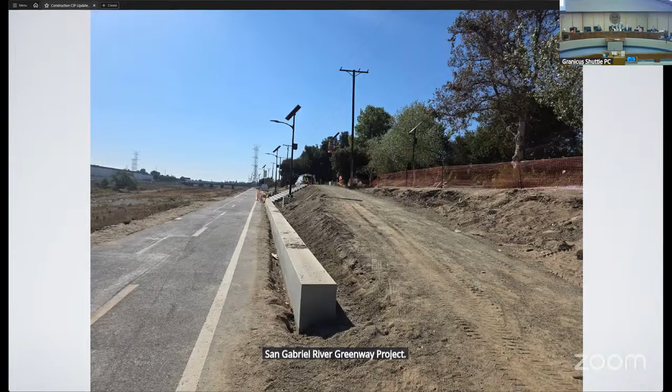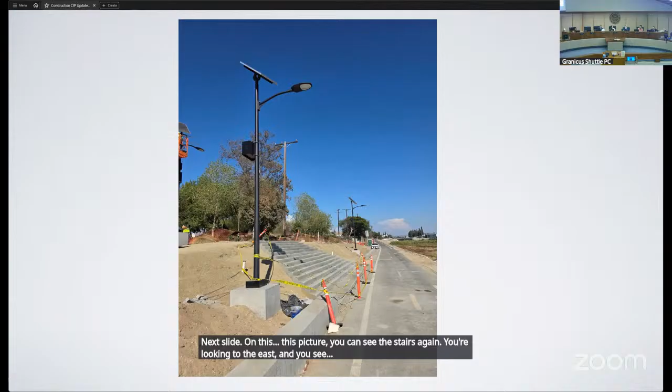These are just a few pictures from our San Gabriel River Greenway project. Here you're looking to the west. Those are seat walls, and in the background you can see the stairs. The stairs were poured yesterday, starting to take shape there at the grand entrance. On this picture, you can see the stairs again. You're looking to the east, and you see a couple of the street lights.

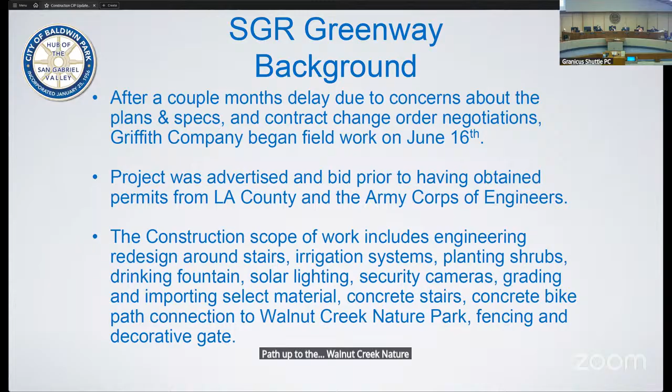Griffith Company mobilized and began construction on June 16th. This was after a couple months of delay due to concerns with the plans and specifications and negotiating a few change orders. Part of that stemmed from the project being advertised and bid prior to obtaining the permits from LA County and the Army Corps of Engineers. The scope of work included engineering redesign, the stairs, irrigation systems, plantings, drinking fountain, solar lighting, security cameras, grading and importing select material, the stairs and the bike path connecting from the existing path up to the Walnut Creek Nature Park, and then fencing and a decorative gate.

The original amount of the contract was about 1.9 million. The city approved a change order in April for project escalation of 130,000. Then in June, we approved a change order on a force account, or time and materials, for extra work with importing material and the concrete path. The original contract provided for 90 working days, and as of a few days ago we had about 25 working days remaining, so working days are set to be up on or around October 21st. But we anticipate providing them another week or week and a half, with a target completion date of October 31st, when we expect this project to be done.

Some of the work they've completed includes grading and site preparation; the irrigation system main line and controllers are complete, besides the drip line and emitters, which they'll install after planting. The grading is pretty much done, and they've graded the path up to the park. The stairs were poured on Monday, September 15th.

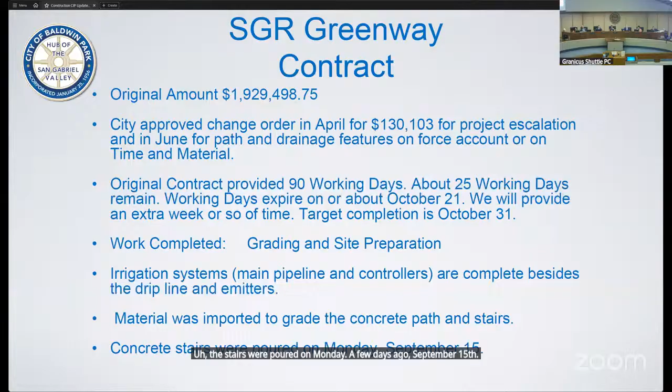The remaining work on the project includes the concrete path, which they're set to pour Monday of next week. We'll have hand railing to do at the stairs and the path. Then we have the drainage design features: sloping from the top down to the seat walls, the treatment behind the seat walls, valley gutters, trench drains, and drainage pipe in the area of the stairs. And like I mentioned, the plantings, drip lines and emitters, and then the decorative gate and the fencing. That's what's left on that project.

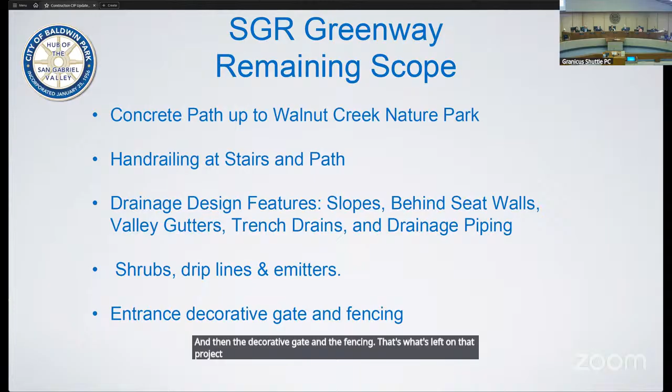Again, the original contract was about 1.9 million. We've executed some change orders. That force account, or time and materials, change order is for rough grading and removing garbage, which they've done, the concrete path, importing material, and then minor miscellaneous items.

So, I don't know how we should do this. Should I stop and get questions on this project, or should I go through and talk about all three projects? How would you guys prefer?

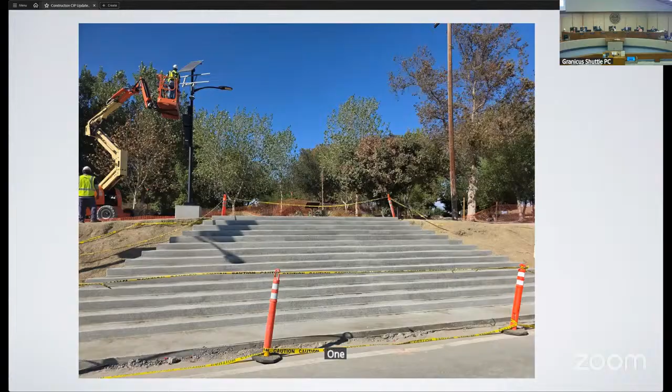Daniel, I do have a question. I saw the stairs and also see you're doing a concrete path. Is it just stairs coming from the bike path to the park, or is it also a walkway, like a slope? David, can you please back up a few slides to the pictures? One more. Yes, there, perfect. Right there. So you can see the concrete path will go up that embankment to where the top of the stairs are, connecting to the asphalt down below.

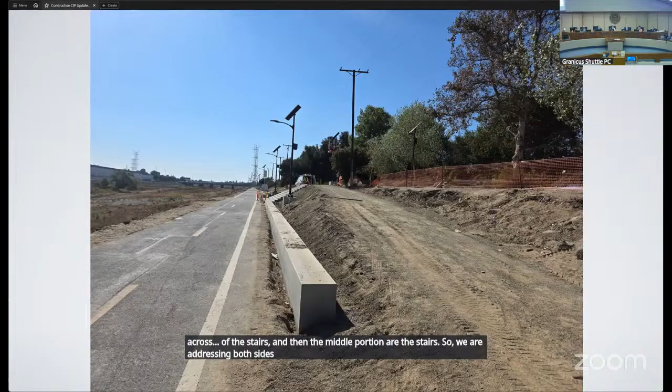If I could interject, there's a path on both sides, so it goes across the stairs, and the middle portion are the stairs. So we're addressing both sides of the trail and the middle portion. Okay, I didn't understand how it was laid out — I thought they were carrying the bikes up the stairs. No, that makes a lot more sense. Okay, I don't have any more questions.

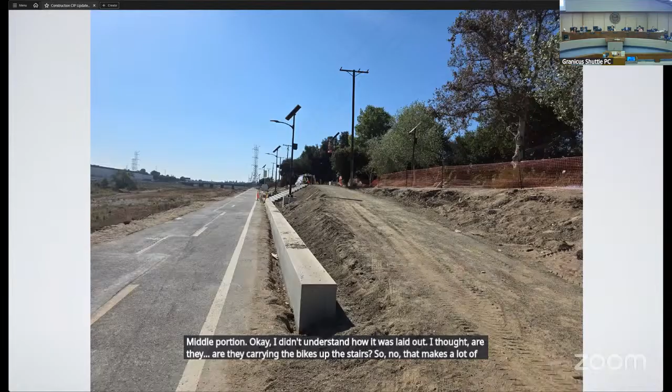Anyone else? Okay, Daniel, we can go on to the next project. So this is Pacific and Bogart, traffic signal and rail safety improvements. As you can see, the poles and mast arms are in, most of the concrete work is completed, and the asphalt is in. Next slide.

This will be a new crossing with a curb ramp here. This one's missing the handrail, so there will be handrailing here, and all pedestrians coming from the north to the south will be forced to cross the street here — they won't be able to continue towards the railroad tracks from this point. Next slide.

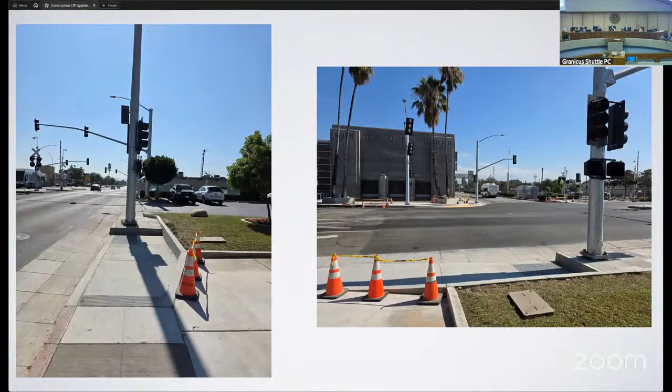The goal of this project is to work towards a quiet zone and make it safer for pedestrians, bicyclists, and motorists. In the future we'll complete rail safety projects at Merced Avenue and McDevitt, and once those are done we'll have established a quiet zone. The scope of this project includes raised concrete medians and pavement overlay, both completed, railroad crossing gates, and establishing new preemptive timing — when a train's coming it will override the traffic signal control to prevent pedestrians and vehicles from crossing, controlling the signal timing. In summary, it modernizes that existing at-grade crossing to current Metro standards.

Even on the last project, we had to get an Army Corps of Engineers permit from the county, which was complicated, but this one's even more complicated because we have to coordinate with the county, Metro, CPUC, and it also involves federal funding. This project has been in the works a long time — kudos to the previous Public Works team for getting it to this point. Construction plans started in 2019, and Council awarded this contract on March 20th, 2024. Next slide, please.

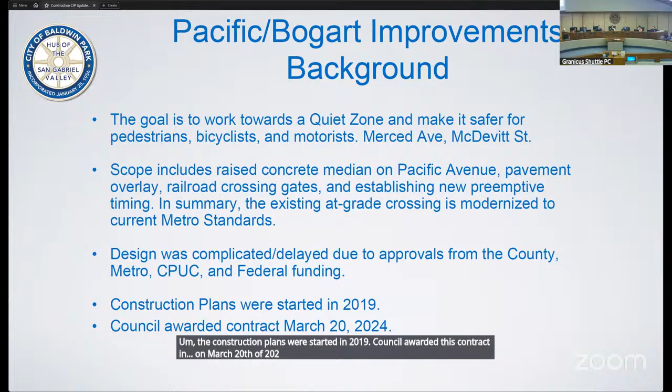The original contract amount for this project was 1.8 million, awarded to Belco Elecnor. There have been limited change orders, knock on wood, on this project. I think it's only been about $7,800 in change orders for 2 pedestrian swing gates.

The contract originally was for 90 working days, but I think the working days were paused due to long lead items. There was a lot of time needed to procure all the equipment for the signal. So this project has been delayed from the time it was issued or awarded as well. I don't know every detail on why those delays, but I'm assuming it had to do with procurement and long lead items. But we are getting very close to the finish line on this project as well.

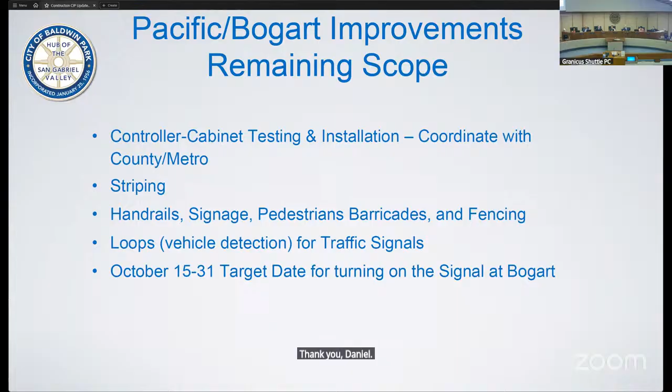What is that on the left, the one that looks like a Christmas tree looking thing? It is a playground apparatus-ish. I would love to say it's a Christmas tree because we always love the December to Remember, but it's a playground apparatus. Yes, it is. It's something different. Are the kids gonna go inside there or? I think it's a combination. Well, you have to be pretty small to go through the small square, so I think it's primarily climbing on the exterior of the apparatus.

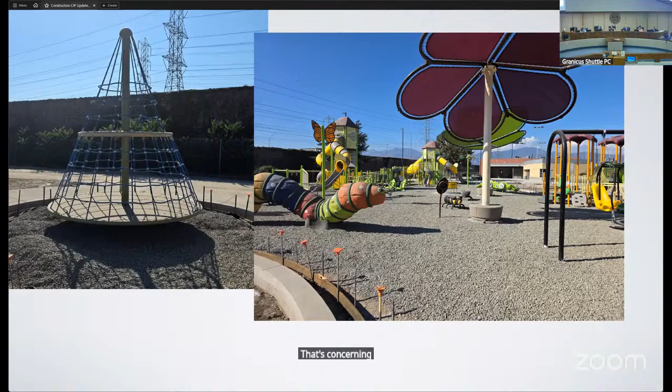That's concerning to me because you do have little ones that may be at the park, and then all of a sudden they're going to get in there, and the parents are going to be stuck. How do I get this child out of here?

Keep in mind, there are age-specific playgrounds, I believe 3 to 5 and 6 to 12. If I'm not mistaken, it will be noted at that young age. Usually the parents are with the little ones, and there'll be rubberized flooring. This is from a reputable playground company, and I think things should go smoothly.

Do you know about how tall that structure is? No, I don't know specifically. If we had to guess, I would probably say about 12 feet. Yeah, I was thinking maybe like 10, but yeah.

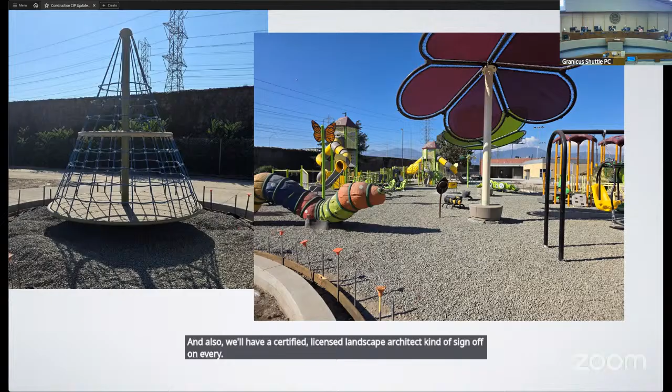We'll also have a certified licensed landscape architect sign off on every component of the playground equipment to make sure it's safe and meets safety requirements. Absolutely, and that's part of the reason why the pumpkin wagon at Morgan Park, if you remember that one from many decades ago, was considered unsafe because a youngster could stick their head in the wheels and possibly choke. So this is safe via all the best practices and guidelines of playground manufacturer equipment.

I work with 3 and 4-year-olds, and they're quick and sneaky, and before you know it they're in something they shouldn't be in. I think it's a great idea, the climbing structure and all that, but my concern is the ropes—they're going to get in there, they're going to get stuck. Are they jiggly ropes, or are they tight? They are very stern ropes, more like metal ropes. I've seen them at different facilities, and they even have large playground structures with this type of apparatus. But the community selected this piece of equipment.

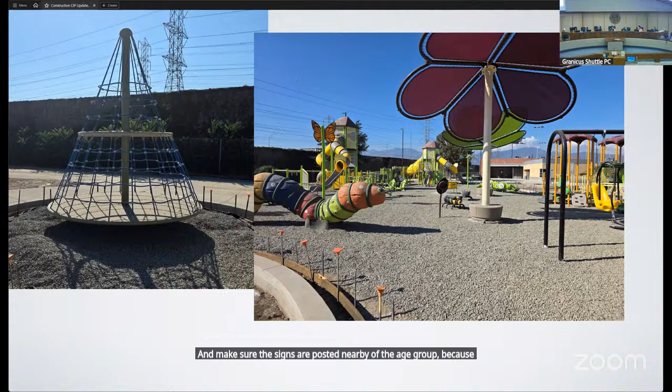Let's just keep an eye on it once you do open it up, and make sure the signs are posted nearby of the age group, because again, 3 and 4-year-olds are quick and they get into things. Absolutely, which is fun for that age, right? Yeah, we will definitely keep an eye on both sides.

My concern with that, Manny, is the rubberized flooring you're talking about—does it have padding? My bigger concern isn't a kid trying to stick their body through there, because it's small, but once one of the kids tries to climb all the way to the top, if they fall back to the floor. Yes, it does have padding—I will double check with the manufacturer. I don't think the intent is for the youngster to climb all the way to the top, but we will definitely check.

There's a standard playground apparatus that kids have been playing on, and will play on in Baldwin Park, and this is installed throughout Southern California, if not the nation. We'll have Manny test it when the grand opening happens. And the padding does eventually, with time, get old and turn hard, like anything—it gets weathered. So the padding does turn hard eventually and has to be changed out because it becomes almost like concrete with time.

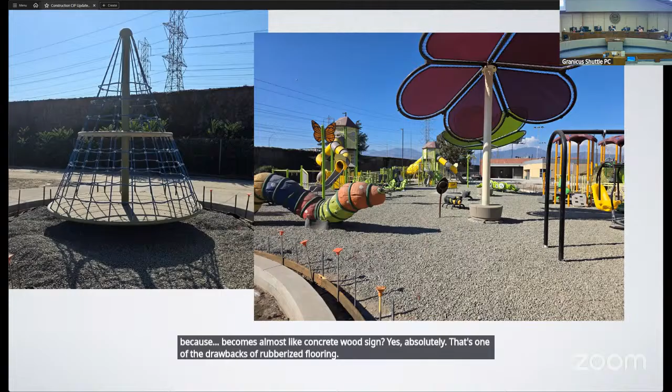Absolutely, that's one of the drawbacks of rubberized flooring—after 3 to 10 years it does get hard or shows cracks, but it is much better than sand, because when you're a parent and you take your little one's shoes off when they're sitting on the bed, sand goes everywhere. And I say that from experience.

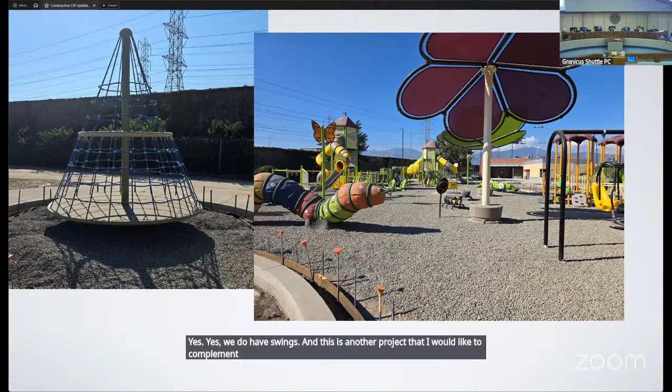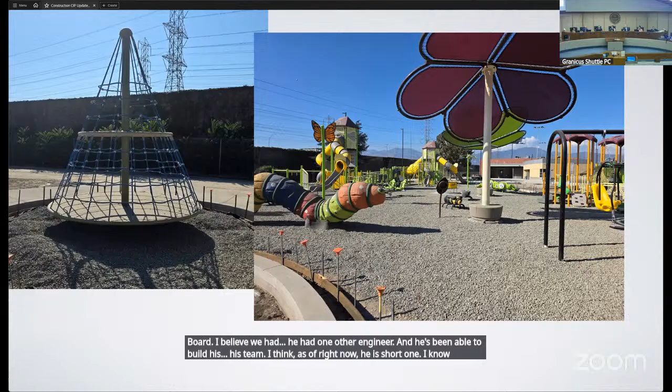Yes, we do have swings. And this is another project where I would like to compliment Public Works—very low staff when Daniel first came on board. I believe he had one other engineer, and he's been able to build his team. I think as of right now he is short one staff member, and he would like to have more, but hopefully that new person will be on board within the next month or so.

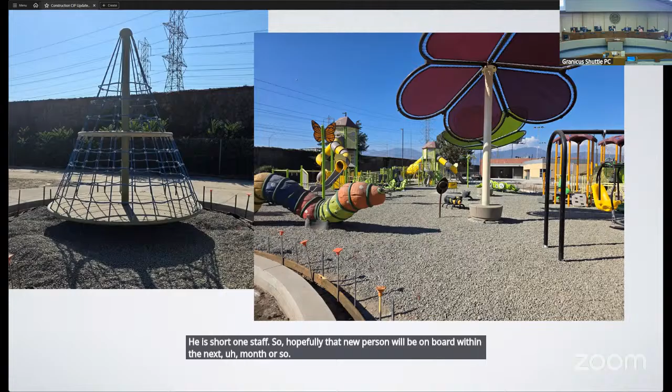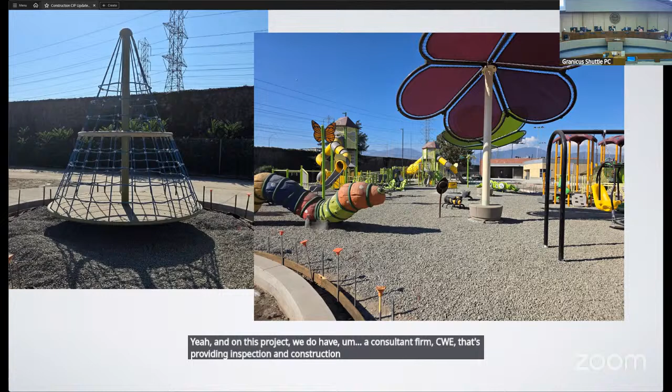On this project we do have a consultant firm, CWE, providing inspection and construction management services, so they're a huge help. This project was well underway, and it's coming along—I think we can see the finish line. Still a little bit of ways away, but we can see it now. So, next slide please.

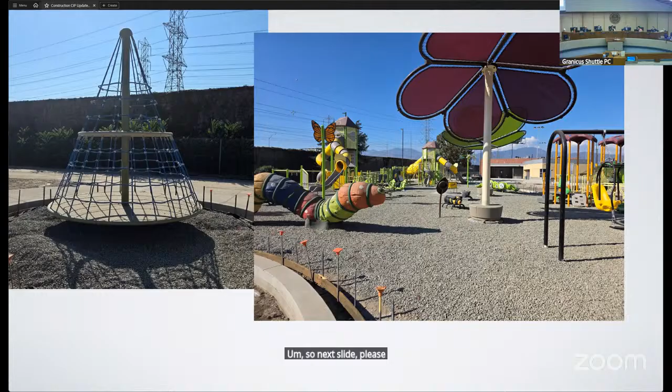This shows again a side of that same playground, and on the bottom right, that's looking to the south, right there on Patriti Avenue. That will be parking just off of the street, so you'll pull off the street and be able to park there

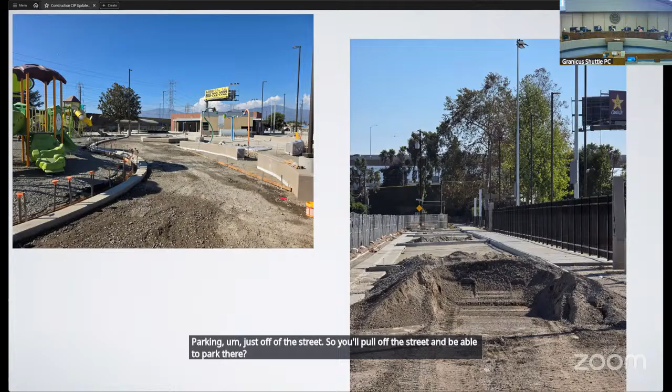Our contractor, Suzer, began work in May of 2024. This project was advertised and bid prior to obtaining permits from Caltrans to install the sound walls. I believe at one point the walls were on city property and then modified to be on Caltrans right of way, due to a potential right-of-way expansion Caltrans wanted.

There have been a few delays with the futsal court redesign due to a couple slivers of land on the north side of the park that were privately owned. I don't think the city was aware of that early on. And then there's also...

to install a 42-inch storm drain pipe in Patriti, a San Gabriel Valley Water Company water main was in the way. That delayed the work a little bit for that segment on the north side.

And then we brought to the council a preliminary easement that we would have to dedicate to the water company, because the city doesn't have a public right of way in Patriti on the west half of the road. That's city property, so we'll need to dedicate an easement so the water company can have their water line on the city's property in an easement.

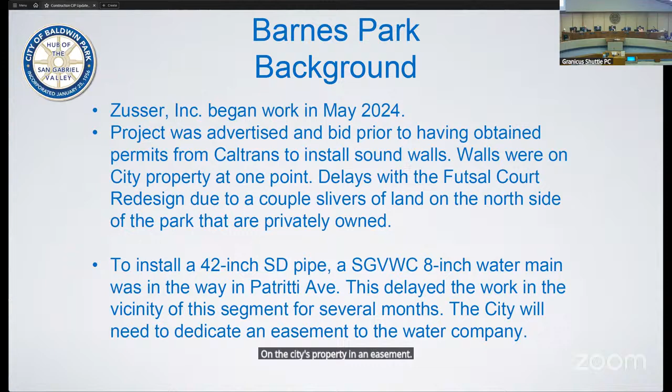The council awarded this $17 million contract in February of 2024 after a bid protest hearing. Per the contract and notice to proceed, the contractor had 370 working days to complete the project. A big part of the project was a storm drain infiltration gallery that intercepted a lot of the storm runoff below grade, constructed 30 feet below grade.

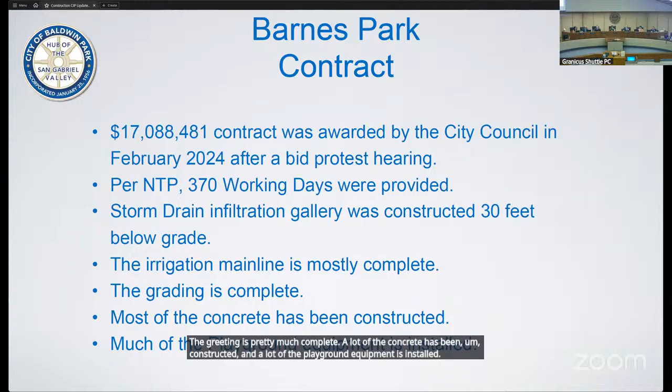The irrigation main line is mostly complete. The grading is pretty much complete. A lot of the concrete has been constructed and a lot of the playground equipment is installed. Also, the storm drain pipeline has been installed as well.

Next slide. Some of the remaining scope is the storm drain facilities on the north side, which can now be constructed now that the water line has been relocated out of the way.

There's still playground equipment to install, fencing, the dog park improvements, plantings, sod, and other amenities such as benches and picnic tables. The water fountains are partially installed, along with sculptures and decorations. Also, we have asphalt pavement to construct, the futsal court, as well as the perimeter walls and sound walls.

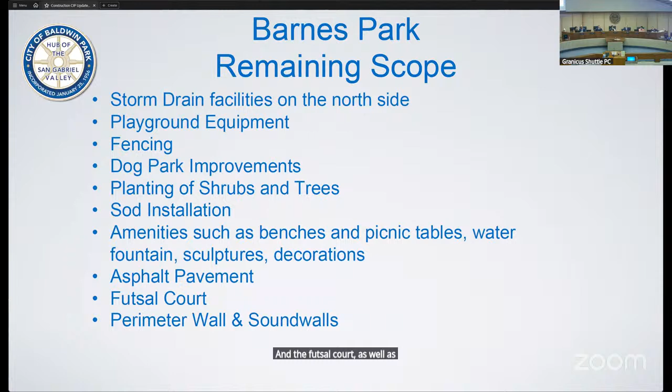Next slide. So now we open it up to questions on this project.

I've got a couple. Daniel, in reference to this project, are the letters that you provided for us part of this, or separate? Okay, yeah, and there's going to be a closed session item on this project as well, and I think the letters are more for that.

Do we know more or less the estimated completion time for this project at this point? I know there's no dates associated with that. So, per the original contract, the completion time was October, November of this year, but given the delays that were caused by the city, the final completion date has not been determined.

Got it, so it's not determined. All right, thank you so much, Daniel. Any other questions? No? Thank you, Daniel.

I know you came on board and there were a lot of projects already in the pipeline with some errors that needed to be corrected, which took extra time on your part. But I'm glad you were able to jump in there and figure out how to make these corrections, so that's greatly appreciated, and the projects are moving forward. You've definitely made sure we're aligning with what should be done and how corrections need to be made, so thank you for that. Thank you for all the work you're putting in to keep these projects moving.